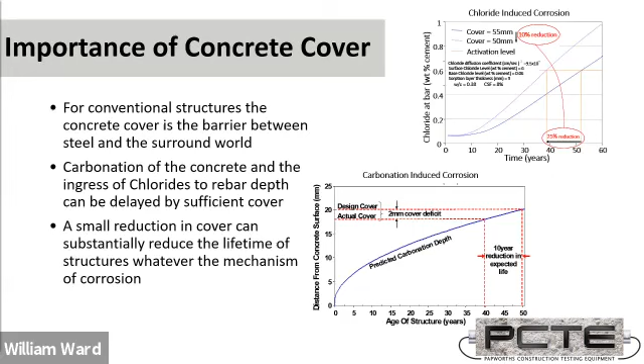Even as much as a 2 millimeter cover depth deficit from the expected cover can take more than 10 years off a 50-year design life. So it's really important to get the cover right. This is why you will see projects have fairly precise cover specifications and the use of non-destructive tools to confirm that cover is achieved. The particular non-destructive tool I'm discussing today is an eddy current cover meter.

To compare that to ground penetrating radar systems and various forms of ultrasonic pulse echo tomography, which is another imaging tool, there's different sensitivities, different precisions, and different depths of focus. The cover meter, eddy current cover meter, is the most shallow depth. A normal cover meter is going to have an approximate absolute maximum range of around 180 millimeters to 200 millimeters, depending upon how large the reinforcing steel is, and it's going to be somewhat thinner than that.

At that thinner depth the cover meter can actually locate individual reinforcing steel. It may still be able to determine the cover depth correctly, but there are points where it can no longer isolate individual steel bars.

Ground penetrating radar is probably most similar in sensitivity. It is also sensitive to reinforcing steel, and most sensitive to other forms of metal as well - post-tensioning tendons, other forms of embedded steel - and has a weaker sensitivity to other embedded objects such as conduits, plumbing, cables, and other areas. Cover meters, meanwhile, are absolutely limited to use over reinforcing steel. They're sensitive to other metals because the eddy current process is sensitive to metals, but when you're planning your cover survey you need to consider other forms of metal as a source of interference rather than as something you can locate and measure with your cover meter. It's not the right tool for that - a ground penetrating radar would be more appropriate.

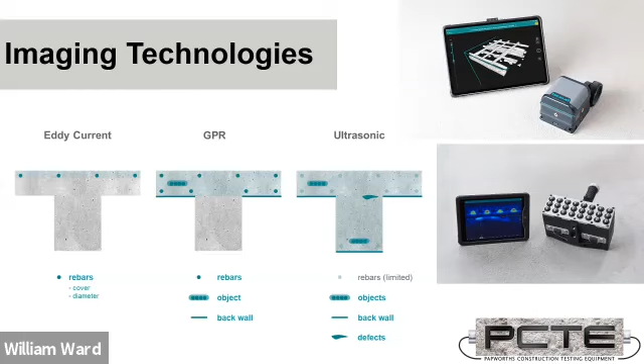So we'll continue talking about eddy current, and we'll begin with the physics and a little bit of the limitations and precision of cover meters.

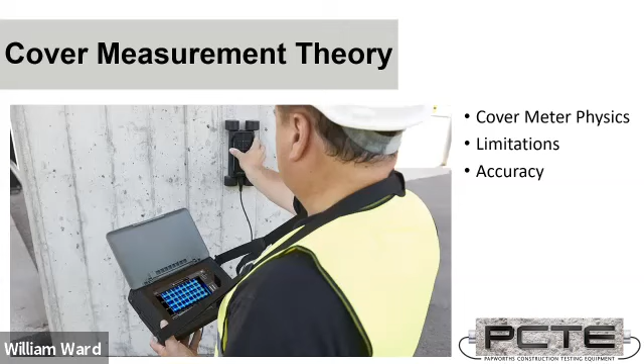The basic principle of an eddy current cover meter is we have an alternating current in magnetic coils, and we bring those magnetic coils close to the reinforcing steel. We then measure the signal strength of an induced current in that reinforcing steel. That signal strength is affected by the distance of the steel and the size, the diameter of the steel.

Any forms of metal inside the magnetic field will increase the signal strength, but the way cover meters are designed is they assume a single reinforcing bar is within that electromagnetic field aligned with the electromagnetic coils. So when you have, say, a 90-degree crossing of reinforcing steel in the other direction, that would artificially reduce the cover depth reading. We want to avoid measuring over areas like that. Similarly, if we have scrap metal or other elements within that electromagnetic field, they will also be a source of interference.

Pulsed eddy current is the most recent development of cover meter measurements. Previously, they used magnetic induction, which maybe had a little bit more depth, but was much more interfered with, and would have a lot more drift over time. So unless you specifically know you've got a ferromagnetic cover meter, most cover meters today are pulsed eddy current.

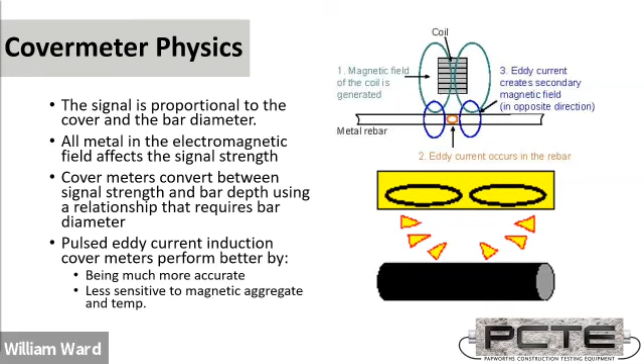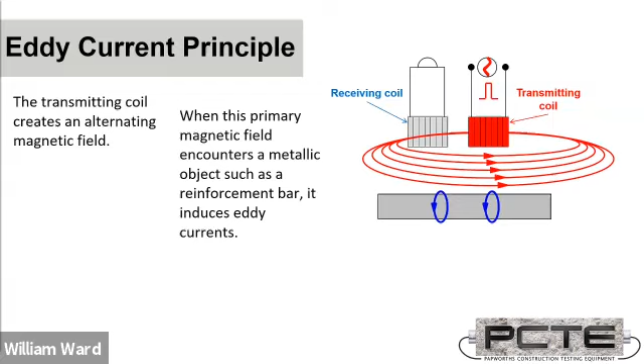Let's go a little bit more into exactly the measurement procedure. We begin by transmitting from one electromagnetic coil an alternating current, which produces an electromagnetic field around that coil. This induces in the reinforcing steel a matching current and a corresponding electromagnetic field. By allowing the first field to decay, it can then sense the strength of that electromagnetic field with a receiving coil. Now, cover meters typically have more than two coils.

The simpler, older style units could only read this signal strength, whereas the Profoscope can actually locate reinforcing steel by balancing signal strengths. And the Profometer has multiple coils, which make it very easy to align it in the clearest possible space for the most precise cover depth measurement.

So this is the basic principle behind eddy current cover meters. We're producing an electromagnetic field and we're measuring the strength of the response. Based upon the strength of that response, we take that to have a direct relationship to the depth of the reinforcing steel.

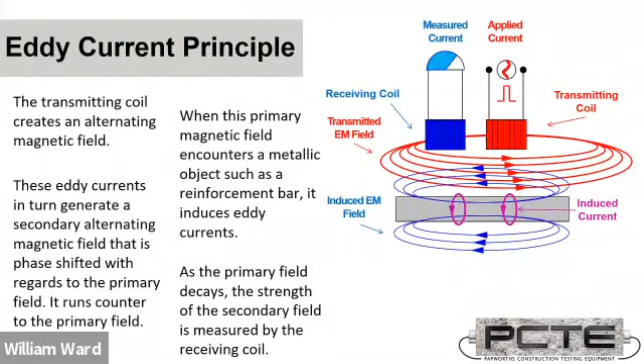So looking specifically at the Profometer probe, there's two matched pairs of transmitting and receiving coils. And they can do some clever things. This is where the first part of the measurement procedure comes in.

When you have a cover meter with multiple measurement ranges, so a Profometer has a standard range, a large range, and a spot range, and a Profoscope has a standard or a large range, you want to choose the lowest intensity system so that you're less affected by anything in the area. So the standard range is the standard choice for the Profometer, and the standard range for the Profoscope.

In both of these cases, the electromagnetic field is smaller. You'll find that the depth is limited to around 80 millimeters for 16 mil reinforcing steel, but that prevents, say, a second layer of steel in a multiple-layer reinforced, dual reinforced slab or floor from having as much effect on the measurement. It also means that other forms of interference need to be closer to affect it.

If we change to the large range, we're going to expand out to our maximum depth range, so around that 180 to 200 millimeters maximum depth, but it's going to be more easily interfered with. On the Profometer, we have a spot probe range that uses only one of the two electromagnetic coils. That's not typically used except to get into tight corners and areas like that.

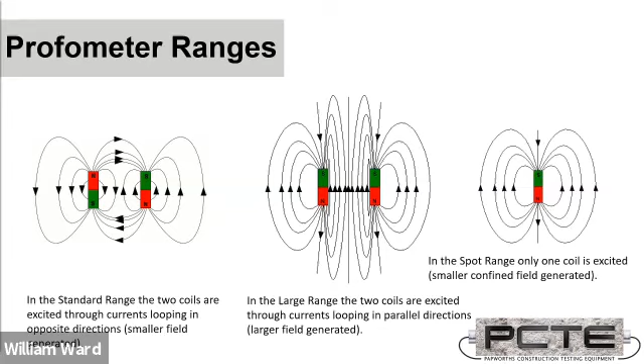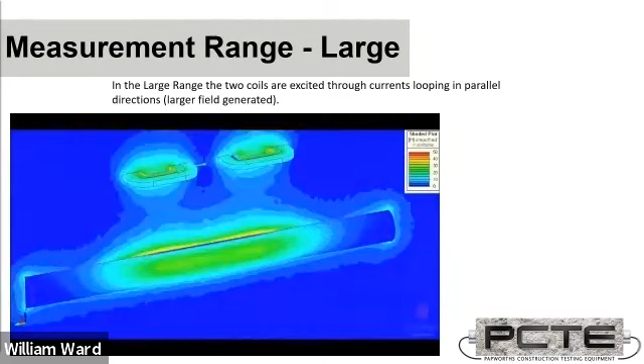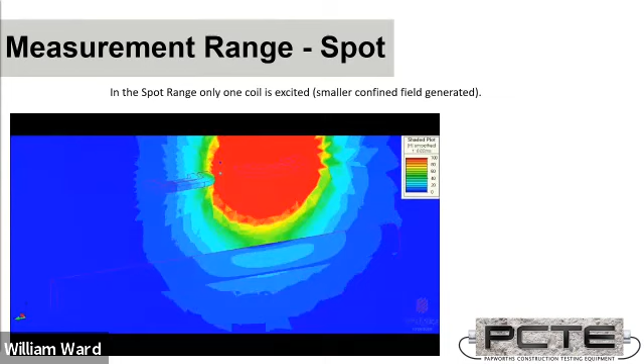So just to show you the difference in these different coils, this is the standard measurement range, the one we would operate in normally. If we then have a look at the large range, you can see that the electromagnetic field has a much larger region of influence, so it's more easily interfered with by closely spaced reinforcing bars. Finally, the spot range only uses one of the electromagnetic coils, again intended to get into tight spaces.

Now, the second thing to consider is the effect that our two controlling factors have on the signal strength: the distance of the rebar to the cover meter, and the size of that rebar, the diameter. If we have a reinforcing steel bar, say 16 millimeters, moving closer and further away from that coil, it produces a large change in the signal strength to that coil.

Because this change is large, it means we can get a very precise variation, even if we move that cover meter only a couple of millimeters higher or lower. That's why when we talk about cover depth, the cover meters, we consider that to be a measurement, and we give it an error range, typically 1 or 2 millimeters within normal cover ranges, maybe 3 to 4 at the extreme ranges of the cover meter. Very precise.

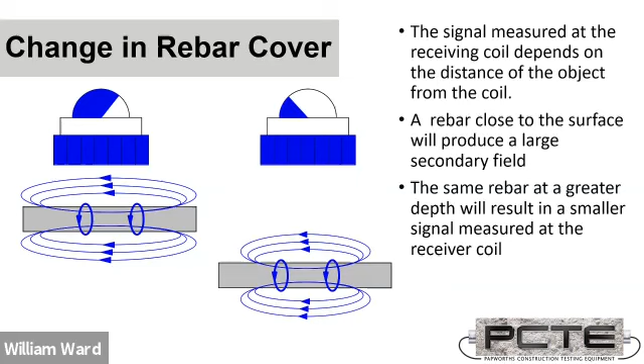Particularly when the correct reinforcing diameter is entered into the cover meter. But if we instead look at a change in rebar diameter, so say going from a 12 mil bar to a 16 mil bar, keeping the cover meter at the same depth, the change is small, quite small, which means that it's not very easy to distinguish smaller bars from larger bars.

And it means when I talk about the diameter measurement functions of a cover meter, I'm going to call those an estimate, and I'm not going to give an error range. While it is the only tool that I'm aware of, and I believe in the market, that can estimate the size of the reinforcing steel, except maybe barring X-ray measurements, it is not the most precise tool for that. And it's typical to confirm, if rebar size is very important, with destructive measurements as well.

So there's a sensitivity there, and we just had this question from Ray Valdez: what do we do when the rebar diameter is not known? That's a good question, and I'll talk about that when I look at some of our precisions, but it's common to assume a value and to understand when we make that assumption what that's going to do to the precision of our measurement, and also to use knowledge of how the structure may be built to select a reasonable value.

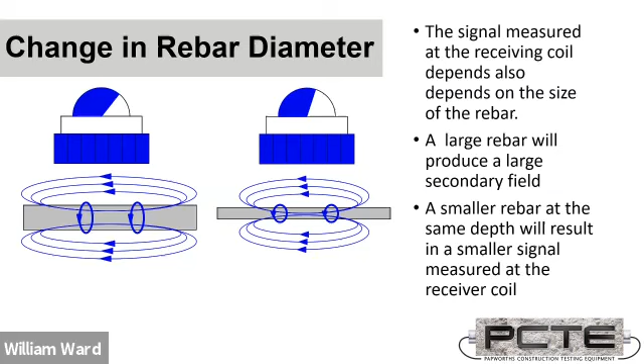So 16 mil bars in conventionally reinforced structures, understanding that something like a slab on ground may only have a thin welded mesh, which we can set to 12 millimeters, but that welded mesh is actually going to also be a more difficult measurement to make. It does have an effect on the expected size, and it does have an effect on the cover depth as well, when you weld a mesh rather than tie it together it returns a little more signal strength to the cover meter.

So let's go through a few limitations now. This is very important with any tool that you do look at. You're going to only have a maximum range, 150 to 180 millimeters, depending upon the size of the bar. A really important one is lapped reinforcing bars. Lapped reinforcing steel, by which I mean when you have one bar laid close to another, essentially forming a join between two separate sections of reinforcing steel.

That can be detected as a single bar location-wise, but it's going to give a very thin cover compared to an isolated single bar. You can commonly see this when you're doing a larger scale cover survey and you measure the reinforcing steel depth. There will be regions periodically spaced, maybe 1.5 meters from each other, where the cover appears a lot thinner, and that would be the region where reinforcing steel is lapped. I've got some diagrams later where I can explain that in a little more detail.

Now, we do want to make sure we isolate our measurements from other bars traveling perpendicular to the bar we're measuring to. Again, I'll have some diagrams, I'll talk about how to do that. But if we want the most precise cover depth measurement, we want to have a single bar isolated as much as possible from any other steel nearby. Typically around 15 centimeters, 150 millimeters, is what we deem to be the range of the electromagnetic field, so we can get everything else outside that range. It's like measuring a single bar by itself.

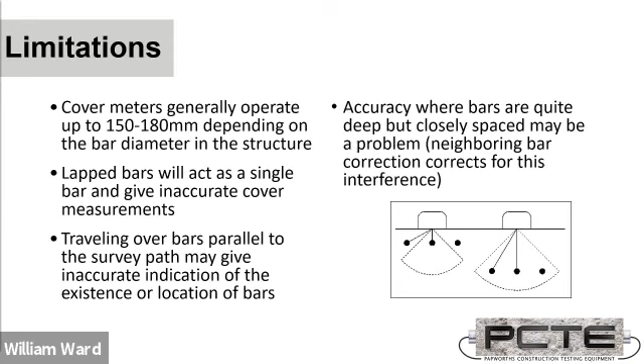If we can't, there are factors like neighboring bar correction that are going to be an effective tool to correct for the interference of closely spaced bars, but we need to know to use them. This is why we need to understand the structure before we take our final cover depth measurements. Now we're coming to accuracy, and this is where I want to discuss a bit about what we do when we don't know the rebar diameter. So what cover meters essentially do to get cover depth is they have an internal table of signal strength to cover depth, and the third factor on that internal table is going to be correctly entering the size of the reinforcing steel.

The precision of the measurements is defined in these charts here. So we're typically looking at 1 millimeter precision to around 40 to 60 mils depth, a precision of 2 millimeters out to around 100 mils of depth, and then 3 or 4 millimeters out to the maximum range of the cover meter, assuming we've entered the correct reinforcing steel.

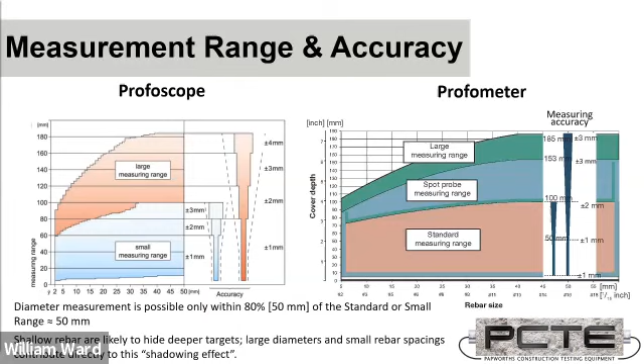Now the diameter estimates have a shorter range. You're typically only going to successfully estimate a diameter to about the 50 millimeter depth. It's about 80% of the short range because the actual measurements use both the short and long range for diameter estimates. So this example is where we can look at what happens if we don't know.

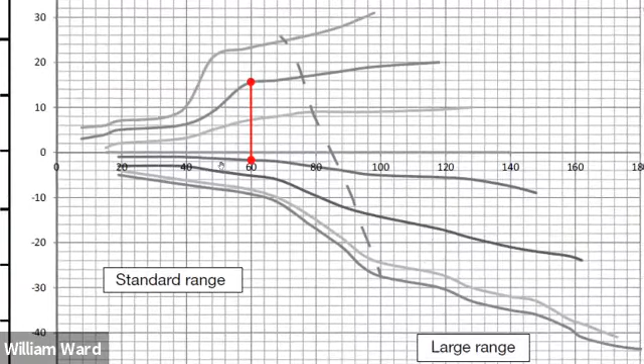So by marking with that red line, I've defined the errors that I can expect in each way. So with a cover measurement of 60 millimeters, we might have 2 to 3 millimeters underestimate and as much as a 15 millimeter overestimate of the reinforcing steel depth.

These charts are available in the cover meter's manuals. This is one way, when you're producing reports where precision is important, to let your clients know: here's the additional uncertainty we're taking into account because we weren't able to investigate and determine the real reinforcing steel size.

Now it is possible, and again recommended when you've got critical cover surveys, to combine them with some destructive investigation. So you can confirm the size of the reinforcing steel bars, and you can also confirm the actual real cover depth with physical measurements, and make any final tweaks to your settings to get the very best cover depth measurements possible. It's not always possible, but it's helpful.

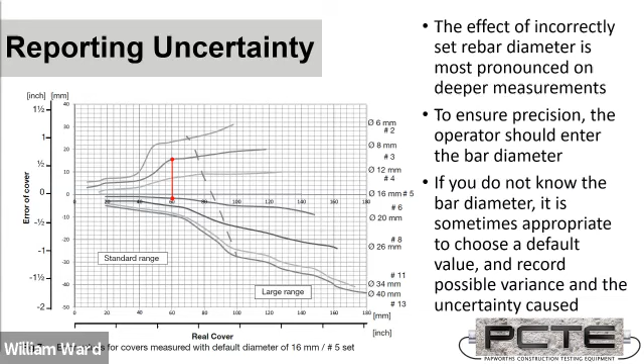Another correction you can do is, if you only have a cover meter but you're also a ground penetrating radar surveyor, you could get the best depth measurement you can with a cover meter and use that to set up your ground penetrating radar dielectric constant or thickness adjustments, to correctly report based upon that cover meter measurement. That will still be more precise than a radar measurement would be.

So let's look at some diameter estimates. The basic procedure for rebar diameter estimates is the system will determine the signal strength with a setting of short and long range energy, and it will then look up what that would indicate the bar size to be.

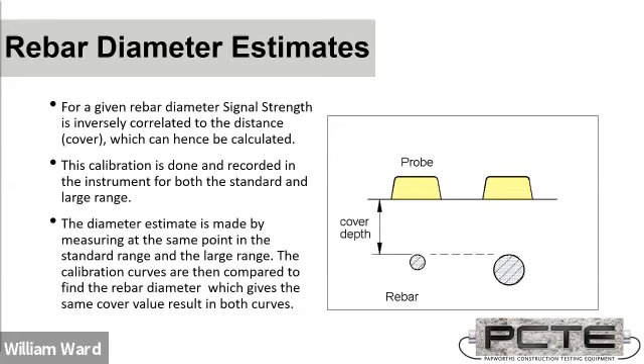It is an estimate. I don't want to give a particular size in plus or minus ratio, but you would really want to confirm this if it was a critical measurement. If you're doing an investigation for a structural engineer and they have to know the bar sizes for their calculations, this should be confirmed destructively.

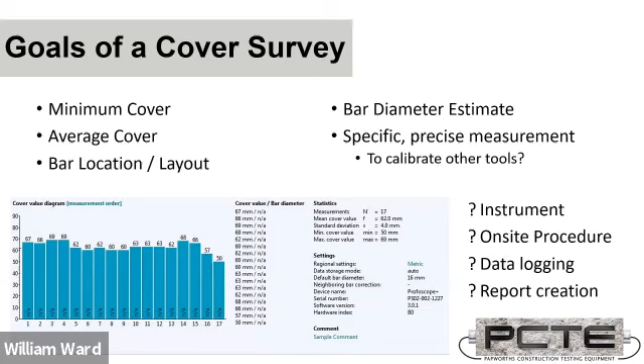If you're going to take bar diameter estimates, you need to define that you'll be doing that. And sometimes you need to produce data logging results, and other times you simply need to find good or bad regions. So this is all going to control how you go about that process.

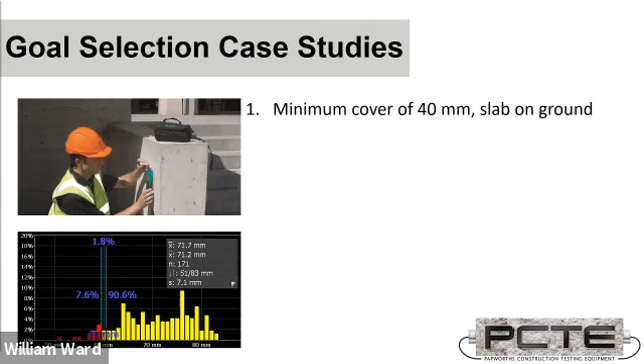Now let's look at a few case studies of how you may pick a system, cover meter or otherwise, to evaluate the cover depth. Start with the simplest one and jump on the microphone if you'd like to respond, or put a note into the chat. If you have a minimum cover of 40 millimeters, so your requirement is you must have 40 millimeters or greater cover depth, and you're measuring a slab on ground, what would you need to take out to do that? Would a simple eddy current cover meter be appropriate? Would you need any data logging functionality, or would another tool be more appropriate? I'll have a look on the chat, or again please feel free to unmute if you like.

All right, so look, this is probably just a Profoscope and a notepad and a tape measure. We've got from Nat Cox, and from Ray we have rebar diameter and normal cover meter, and that's quite right, Ray. If we were building this, we'd know the diameter, so we'd be able to choose that correctly. If it was a welded mesh, we may actually want to get a piece of the mesh and do a few experiments to choose the right settings.

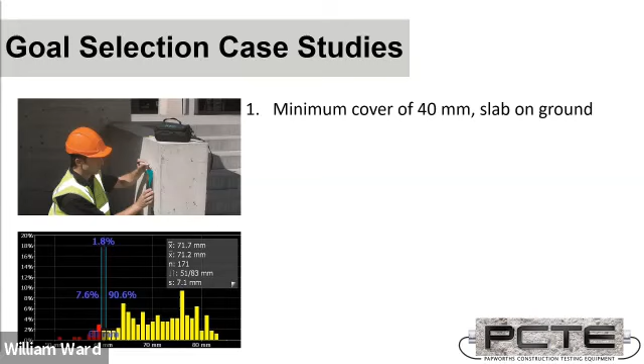So our second case study, we have a bridge girder with 100 millimeters bar spacing, anti-burst cages, by which I mean additional reinforcing close to edges where force may be applied, and a minimum 40 millimeters cover. So it's fairly similar to the previous example where we've got a minimum cover we need to achieve, but now we've got a more complex layout.

Now we have another question, which is, would you need to know if the mesh was welded or tied to allow for error factor? It is very helpful to know if the mesh is welded or tied. As I said, welded mesh can return a stronger signal to the cover meter. It also tends to really overestimate diameters of welded meshes as opposed to tied reinforcing mesh. It's somewhat common to consider larger reinforcing steel to be tied and thin reinforcing steel to be welded, just because of how it's typically brought onto site. But the more you know, the more precise you can be with the tool. And this is where, if you don't know and you've got a really critical measurement to take, you do need to start considering whether destructive investigation needs to be part of the project as well.

So in the example I was giving about a more complex minimum cover process, it's absolutely appropriate to use a simple cover meter. If we know we have 100 millimeters bar spacing, we should use some form of neighboring correction factor, or another way of eliminating the influence of those closely spaced bars.

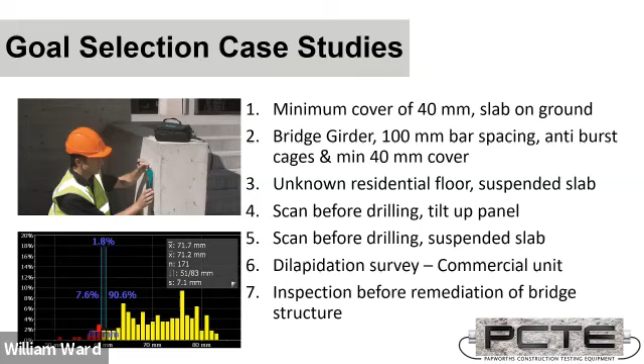And that's similar with inspection before the remediation of a bridge structure. It's very important to understand what the cover's doing, and is it still providing protection, or is it too thin and the outside world is starting to cause troubles on a structure that's going to be remediated.

That's a few examples just about choosing the tool for the job and how tools are used. Do we have any more questions from that before I move on?

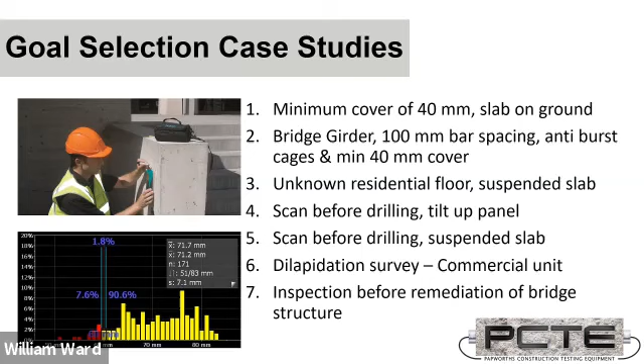So let's go to the main point of today's presentation, which is how to operate the cover meter to measure cover most precisely.

And it all comes down to understanding as much as possible how the structure is built before you take your meaningful measurements. So on a simple reinforcing steel layout, you're going to want to mark up the position of the reinforcing steel. I've put these marks in red to indicate that we are not yet recording and saving cover depth measurements. We're only using that cover meter to determine the position of the reinforcing steel bars.

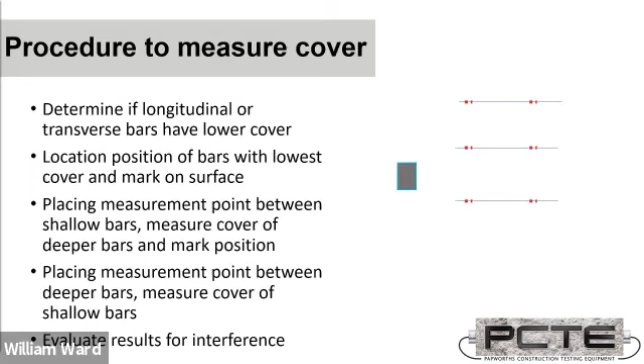We also want to determine which reinforcing steel is closest to us, because that's the most important for the cover depth. So once we've determined the position of the steel closest to us, the thinnest cover, we can then move our cover meter probe.

Through the middle of the perpendicular bars and begin to mark positions and record cover depth measurements. Once we've got that, we can then take our most critical cover depth measurements, where we're recording the depth of the reinforcing steel closest to us, with measurements right through the middle of any perpendicular bars.

So if you just take the cover meter and place it on the surface, you're not taking these steps to remove the influence of additional reinforcing steel.

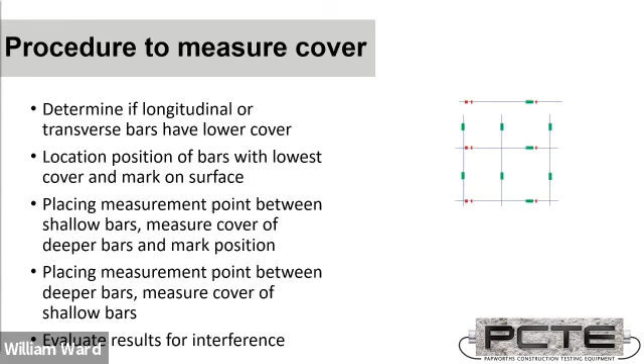So coming back to our limitations, when we have a single reinforcing steel bar by itself, or bars that have a separation of around 150 millimeters or more from each other, that's entirely appropriate to measure to with no adjustment. Once reinforcing steel is closer than 150 millimeters from the neighboring bars, a correction factor should be used.

And regions where you have lapped reinforcing, or having the probe oriented on top of perpendicular bars, you're not going to be able to take a precise cover depth measurement in those areas.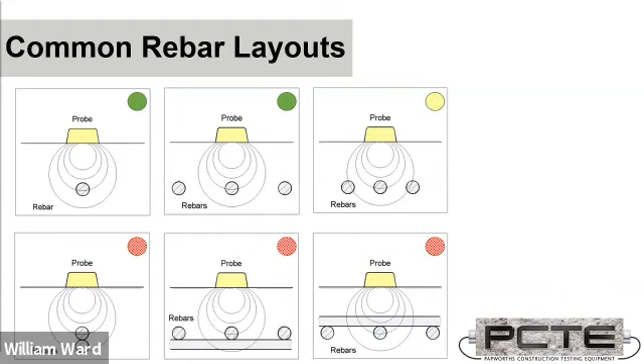So if you're setting up something like a data logging functionality, you still need to know, at least in general terms, where lapped regions may be, or be willing to say that this region halfway down our data logging measurement area is indicative of lap reinforcing steel, and we should consider the areas above and below it as our correct cover depth measurements.

So we've talked about the simple elements. We've talked about how to go about getting the best places to measure. So what about some of the complexities of the matter?

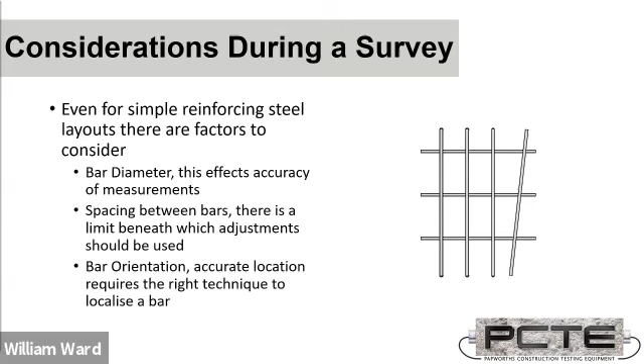Even for simple slab on ground, we still need to consider that the orientation is as we expect it, that we know that the diameter we've entered is a reasonable choice, either based upon our knowledge of structures or our understanding of what's there. And we also need to take into account any bar spacings.

Once we go to a more complex layout, this is where it's important to come armed with enough information to do the survey.

If you have access to drawings, this can help you choose regions that are clear to survey. If you have to measure cover in areas with dense reinforcing steel, it's important you use a cover meter, which can be set up to do a QA assessment of good and bad, or to understand what to do when the steel is so dense. Your cover depths are not going to necessarily correspond with normal diameter settings to the real cover depth.

So firstly, a question for everyone here: what regions on this rebar layout are going to be appropriate to survey with no modification of the cover meter settings? Just say top left, or middle right, or give me some positions in the chat, or you can unmute if you'd like to.

Top left area, which is correct. That's more like a conventional reinforcing setup, so there's no difficulty measuring in that area. Has anyone spotted any other points that would be appropriate? Dennis has none. I'm interested to see why you're saying none there, because it might be a logic I'm not using, which would be good for everyone to keep in mind.

So again, if we assume we don't have a welded mesh situation, we are able to, without correction, survey top left and top right. There's also a couple of spots here and here where we can isolate an individual bar, but we'd have to know those spaces were clear to measure, and we couldn't do it just by sketching the layout on the surface. Another region here would be appropriate because it's unlapped, but you would need to use something like a neighboring rebar correction.

So again, this is not a perfect example. It's just something I've sketched up to show the way that you need to go about thinking to determine regions that are appropriate to do cover surveys.

For example, if you did need to determine that the lapped regions had sufficient cover, it may be appropriate to make a mock-up and then measure with a plastic ruler what signal response would occur near to that mock-up and use that as your criteria. Maybe adjust the bar diameter to better represent that lap situation. Profimeter cover meters actually have several correction functions that are intended for that procedure.

So if you have a precast yard and you have your cages visible, you can pick spots that you'll be doing QA measurements on and record a calibration setup that will measure depth for QA purposes correctly to those ones. That can be quite helpful when you're using a cover meter for QA. The Profimeter's a very powerful tool for more complex jobs.

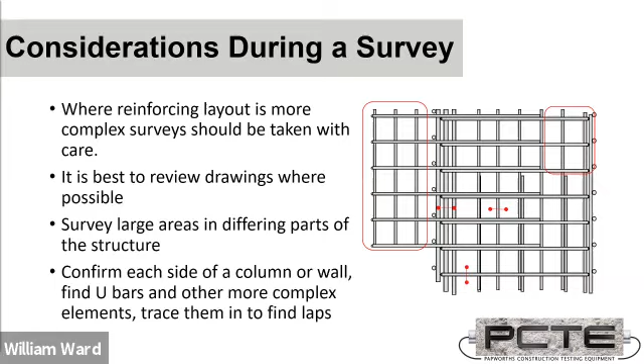So just a few examples on interference. Is the second layer of rebar, so top and bottom steel, going to be a source of interference in a 250 millimeter diameter thick slab, given what we understand of settings and cover meters?

And again, so if you drop some answers in, please. Okay, and yeah, it's reasonable to consider that in a standard measurement mode, we're not going to have any substantial interference from that.

If we do go on to a dual layer reinforcing in a 150 millimeter thick slab, it's going to be more difficult, because with 150 millimeters, it's quite likely, even with the short range, the electromagnetic field is going to be somewhat influenced by the second layer of reinforcing steel. And yes, absolutely, it does depend where the second layer is, and the more information we have, the more we're able to balance this.

So is a post-tensioning tendon would be a source of interference if it's within the electromagnetic field of a cover meter.

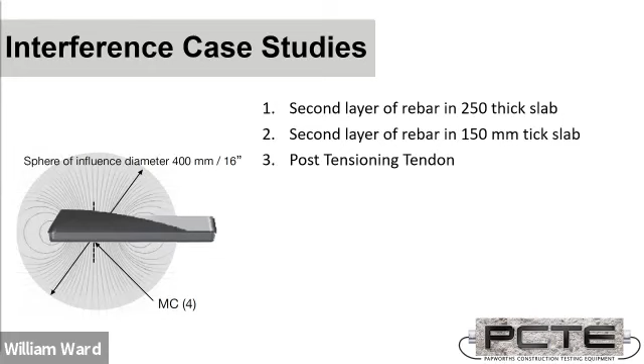Tie wire, dropped to the bottom of the formwork, I haven't seen any influence of this sort of thing from the top, but when I've moved a data logging cover meter over the bottom of a slab, there's a couple of regions where there's just a few pieces of tie wire that indicated incredibly thin cover because that tie wire was so close to the surface of the probe. It doesn't need to be a lot of metal to have a strong influence if it's close to the surface of the cover meter probes.

Power cables, because it's an eddy current cover meter, it is responsive to metals, not just steel, so that will have an effect. Yeah, if you did have a steel bar chair, you would certainly have that have some influence on the measurements, particularly if you were measuring from the side with the bar chairs coming in.

Iron oxide aggregates like that have less of an effect on an eddy current. You're not really considered that a colored concrete would be difficult to measure.

Now, if you did have stainless steel, because the cover meters are eddy current based, they will respond to the stainless steel. It's definitely worth confirming that the measurement is the same to a mild steel reinforcing, but there is definitely response.

Now, cast in place formworks, say like a Bondek, because those slabs can be quite thin and there's a lot of metal down the bottom, it could be a source of interference.

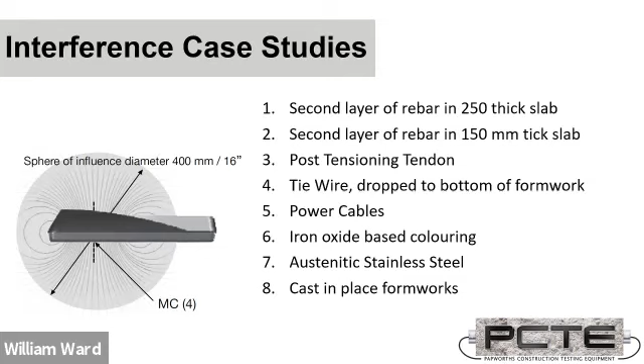And the commentary on ferritic or duplex stainless, I simply haven't tried enough different forms of stainless to know exactly the response of every piece. It's certainly the case where, because it's an eddy current measurement, if it can conduct the electrical currents, then it should produce a matching electromagnetic field. If the steel electrically cannot produce a matching electromagnetic field, it wouldn't be detected by the cover meter.

So just a few looks at some of the actual systems that get commonly used. The Profoscope cover meter is a more simple cover meter device. It's got the same precision as a larger two-part cover meter with a probe and separate readouts. So you don't necessarily choose a Profoscope because it's smaller and less precise. It has the same precision, but it's a simpler device.

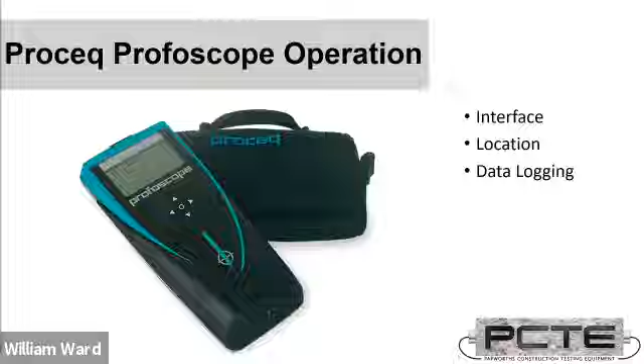So doing the most complex work is going to be difficult. It's also reasonably limited in data logging. So just to show the operation, this is me with my old hair.

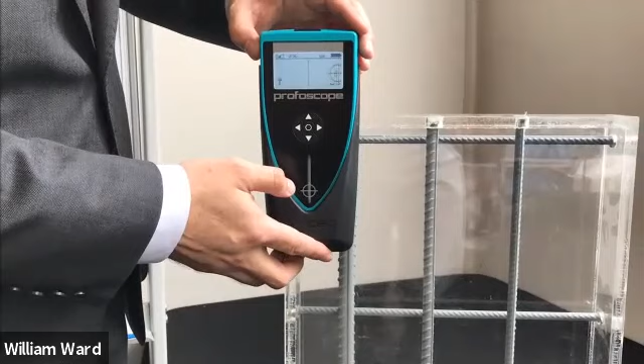We can see here that the cover meter is sensitive to reinforcing steel before it's reached and will lock on. I've placed my measurement point, which is the crosshair near my thumb, towards the middle of the reinforcing steel bars, and I'm moving that over. When the circle approaches the opposite direction I'm moving the probe, we can lock onto individual bars. I can also detect the midpoint when the circle is moving in the same direction as I'm sliding that cover meter left or right.

Again, locked on. I've entered a 16mm diameter bar, which means this will be our most correct diameter measurement, because the bar on the right is smaller, the bar on the left is bigger. We see that maybe that diameter estimate was perhaps not as good as we would like. So again, good for depth, not quite as good for diameter.

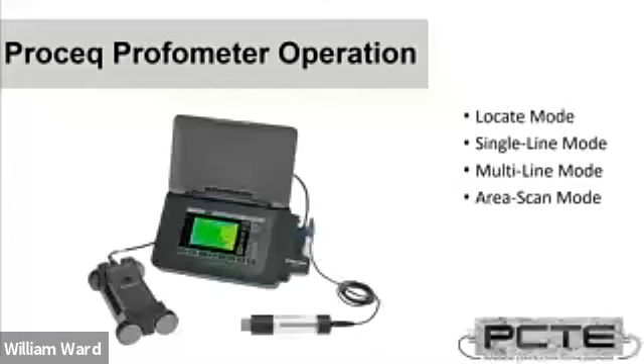Now the Profometer cover meters, compared to the Profoscope, these are better for presenting results and better for complex work. So we have an analogous operation mode to the Profoscope where we can line up the cover meter over top of a bar and record values of cover depth and diameter estimates.

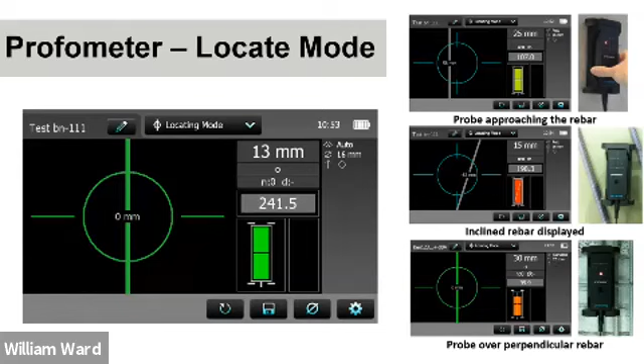But where it differs is we're going to be able to see better how our probe is aligned. On the right-hand side, we can see a couple of examples. When we are correctly balanced between top and bottom perpendicular bars, we have an indicator showing us that's happened. If we are moving over bars that are not aligned parallel to the cover meter, the machine can indicate that.

In this case, I've placed the cover meter so a perpendicular bar is directly underneath the lower coil. The signal response is uneven, and the machine actually tells us, don't measure here, don't measure here, measure in the balanced clear region. So it's already helping the operator make intelligent choices about the right place to measure cover depth from, more so than the Profoscope does.

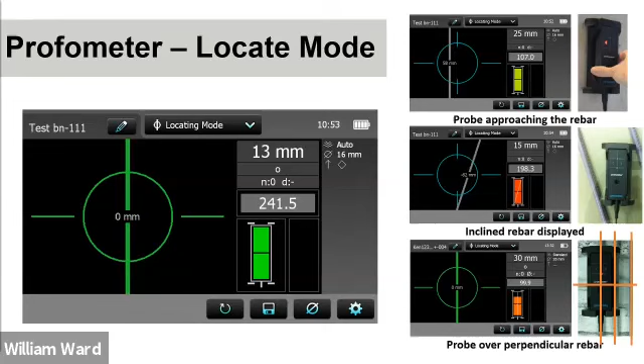Which means that while we should certainly still be marking the reinforcing positions on the surface of the element before we take our cover depth measurements, the machine's helping us get it right, even if we've been a little bit careless while doing that. We now go to some of the data logging functionality.

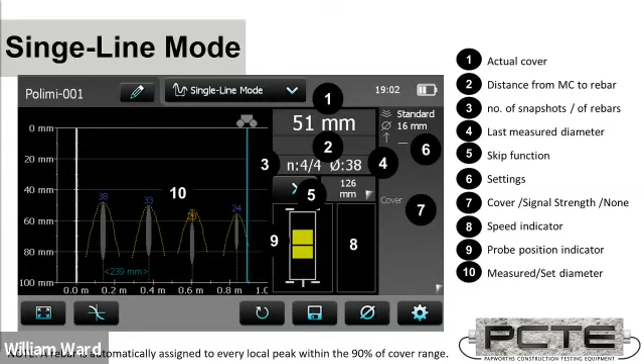So it's possible to set this up to provide quite a precise report of cover depth by spacing in one direction. There are also multiple line measurement modes.

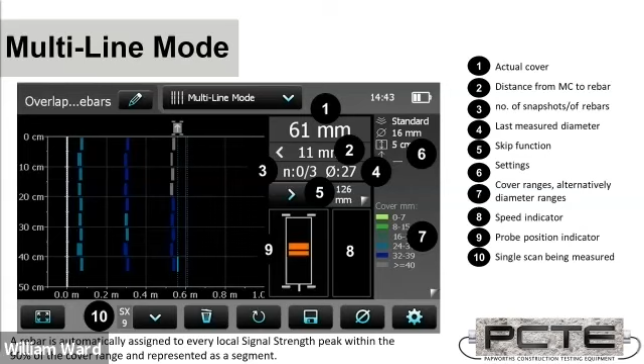This is more like looking top down and determining depth of reinforcing steel this way. In this example, it can be seen that the cover depth is shallower on the left-hand side of the survey and deeper on the right-hand side. So again, this is all ways to present data clearly with the same eddy current measurement of a cover meter.

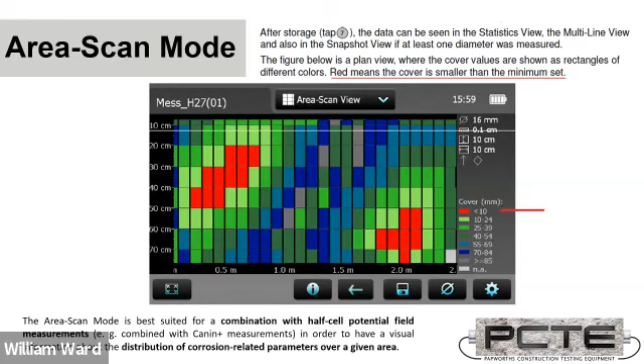So just highlighting some of the ways to present data available with the Profometer. That's the conclusion today for a discussion about correct use of a cover meter and things to be aware of while operating them. Does anyone have any more questions, any comments they'd like to make from their own experience using cover meters? I'm happy to chat a little bit before I sign off for the afternoon, and thanks so much for joining me today.

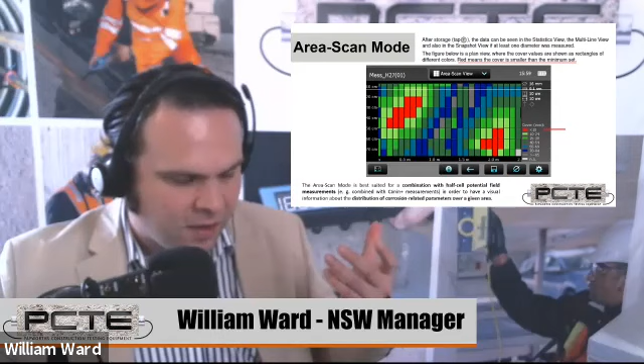Now, that's an interesting question. I haven't seen much work done over regions where the anodes are already in there. They are metallic, so they will definitely act as a source of interference. If you are measuring that area, it's certainly going to have an effect. Usually, of course, the cover meters are brought in before the anodes go in to see that the areas are clear, and they work quite well for that. There are also specialist ones used to pass down holes, which are separate to other cover meters.

So yes, Dave pointed out it's very important to recognize the measurement point for a Profiscope, and that's quite correct. Every cover meter has a center point where it's deemed the measurement occurs. You need to know where that is before you move it over and take cover depths, because otherwise you can be misaligned if you just use the visual center of the probe.

A question from Matthew about how does steel fiber affect readings? Did you say it becomes impossible? That's right. If you have steel fiber reinforcing, essentially the metal's right on the face of the probe, so it's going to stop there. It's not going to work. Ground penetrating radar also won't work. The only thing that has any chance is ultrasonic measurements, and they're quite difficult to use. I've seen it done once or twice, but it's not a common tool.